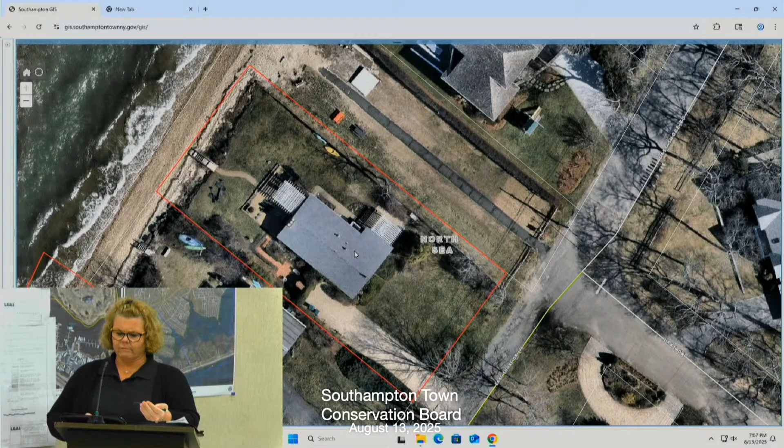But at first glance, I don't believe that the plan really makes much sense. It insinuates that the existing lawn is higher than the beach by a significant amount. The beach is at elevation 3, with the grade in the existing lawn between 5.5 and 6.5 feet above sea level. But I'm going to go back to that in a few minutes.

So at the last meeting, we discussed the elevations of the 5 other properties to the north where similar shoreline protection structures were approved by this board between 2018 and 2021. In reviewing the surveys for those projects available in the town GIS, there's no significant difference in elevation between 37 East Shore Drive and the 5 others to the north: 43, 47, 51, 57, and 59 East Shore Drive. All of the lowest elevations for the 5 other structures begin at around elevation 3, 4 in one circumstance, I believe, and go to a maximum height of elevation 8. Our property's existing elevation is around 6.5 feet.

So it's comparable. Recently, I was contacted by the owner of 63 East Shore Drive, who is the first property beyond the narrow association walkway that has a bulkhead, so from her property beyond to the north are all bulkheaded. She had contacted me because she wanted to ask about a potential project on her property, and reminded me that I met her at her property in 2019.

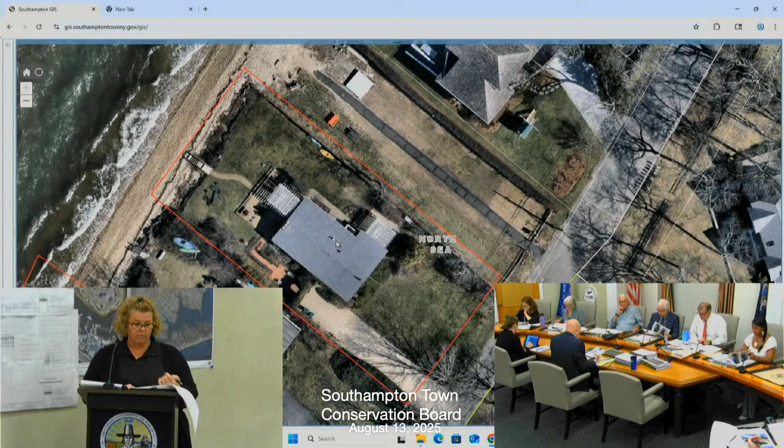So I wanted to show the consistency of the width of the beach throughout these photos, and the consistency of the makeup of the beach, in that the higher beach area is mainly comprised of cobble, and between the high water mark and that cobble is largely comprised of sand. Seaward of mean high water, you start to get more cobble within the water.

So that 1,000 linear feet stretches over 11 properties and the association access, between my client's property and the 43 East Shore, which is the first and most recent rock revetment that was allowed.

So all that being said, Marty provided me with a plan that I believe you should probably have in your file. I don't see it actually. Is this in here? It looks like this. Okay, yes. Along with a survey where he designates the areas that he's drawn.

So he's proposing a 3-foot wide by 5 to 6 foot high berm of cobble, proposing 2.5 inch to about 5 inch diameter cobble, with a 20-foot wide vegetated buffer beyond that. He's also proposing us to deposit cobble and sand, then plant within that cobble and sand to replace the existing lawn. So in my little time reviewing this, I kind of see this as a temporary fix.

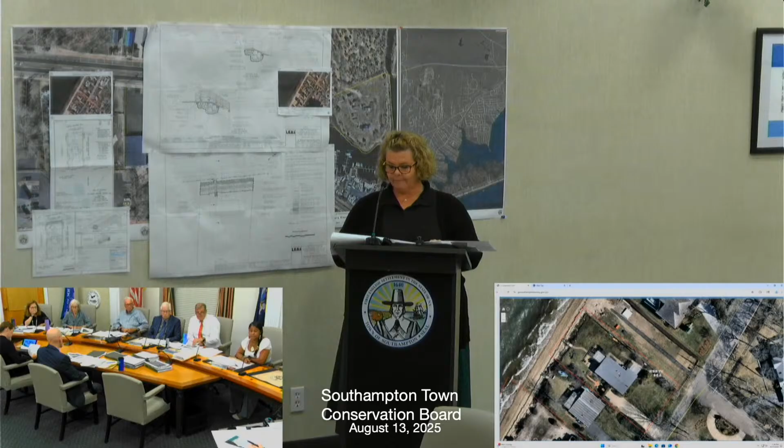Just a couple of reminders. The plans we submitted are identical in scope to 43 East Shore across the way, about 50 feet from where we're talking. Our proposal for an angled rock wall is better at dissipating wave action than something more straight. We discussed this at the last hearing. We also talked about the 5 other approvals—3 of those did not require this much scrutiny. In a hearing situation, they were just granted.

We discussed cobble and sand over the rock to be planted to stabilize it. We also discussed the loss of property—we estimate about 8 feet was lost between 2018 and 2024. So the goal is to maintain what was lost before it gets worse. There was no structural peril on any of the 5 properties, nor on this lot, but the goal is to prevent further erosion. Lastly, the New York State DEC granted us a permit for this with no questions asked on October 16th of last year, so we're sitting on that permit.

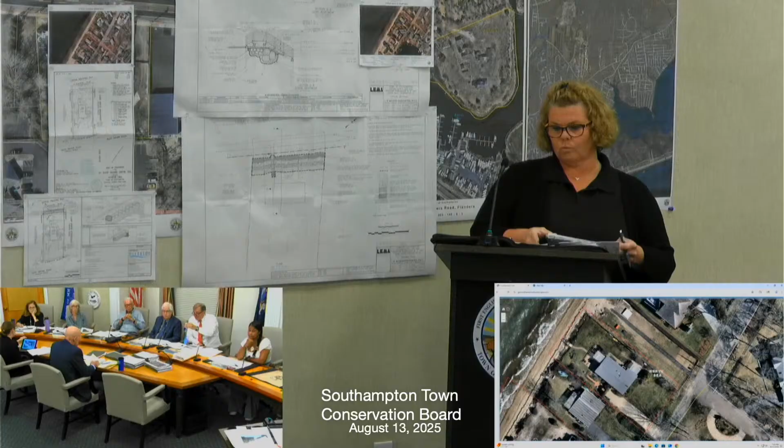Otherwise, I am here tonight with Nika Strunk, who would like to make a presentation, unless anyone has any questions for me.

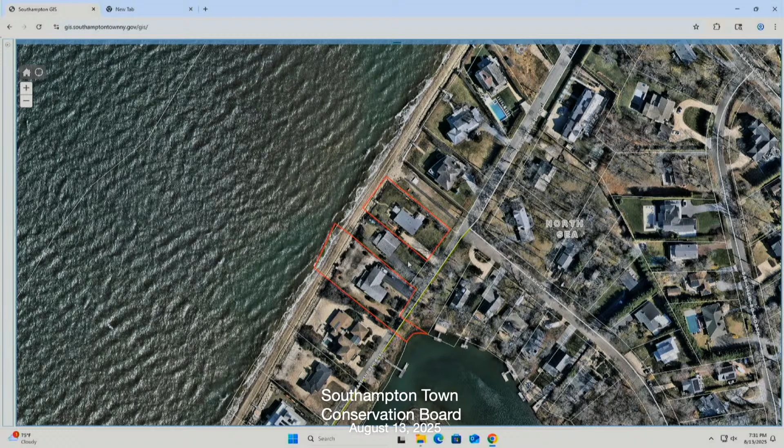And lastly, as a matter of law, which is the reason that I've been brought in here, this board is required to adhere to its prior precedent. It has to treat all applicants equally. I have 2 cases cited in my letter.

One is Hamptons LLC versus Rickenback. You have the cite in there, your counsel can review it, where a special use permit application was, quote, virtually identical to that of a similarly situated property owner in the same zoning district, whose application for the same special use permit had been granted by the appellants. A denial would have been arbitrary and capricious.

There's also the decision of Knight versus Amelkin, from the Court of Appeals, the highest court, that says a decision of an administrative agency which neither adheres to its own prior precedent nor indicates its reason for reaching a different conclusion on essentially the same facts is arbitrary and capricious. So I submit that as a matter of law, given this board's history of allowing property owners on this very, very vulnerable stretch of beach to protect their land, it would be arbitrary and capricious not to grant the application.

And I'm just going to make a little correction to my letter, and I'll submit it this evening. Thank you very much. I'm just going to write my name here. And I'm happy to answer any questions that you may have. Thank you.

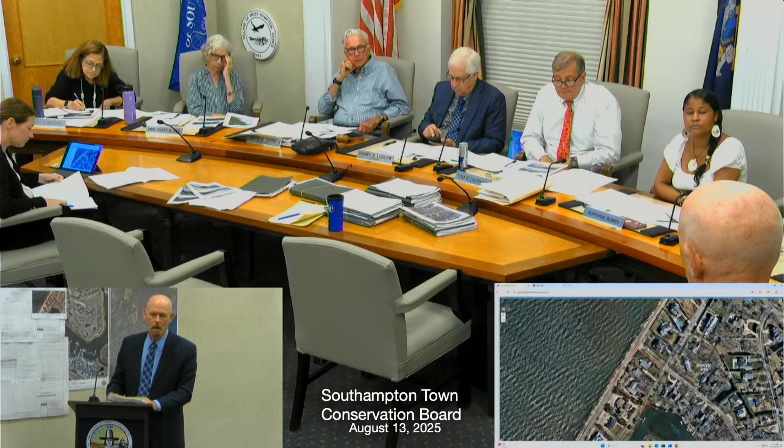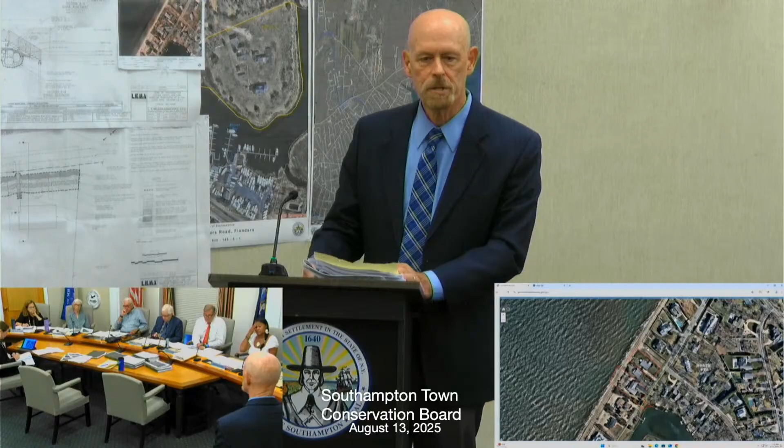Erosion is a natural process. It occurs along every bay beach, along every ocean beach. You have seasonal change from winter beach to summer beach. You have periodic storms. The erosion that occurs along beaches is not something that's artificial.

It's part of how the natural bay beach ecosystem functions. The degree of erosion at the subject property right now is not significant. The escarpment is about 1 to 2 feet. The home is actually located outside of the FEMA flood zone, and the improvements are located significantly landward of the beach. So they are at present at no risk of flood or storm damage, nor is there any evidence of recent damage occurring to those structures as a consequence of winter storms.

While the site conditions at every property are somewhat different, just quickly touching upon the permitting of rock further north - much of that, I believe, was done as a response and reaction to the court-ordered construction of a 6-foot-high concrete wall at 55 East Shore Drive. There was significant concern on the part of some that the presence of that seawall, which this board did not permit, would have

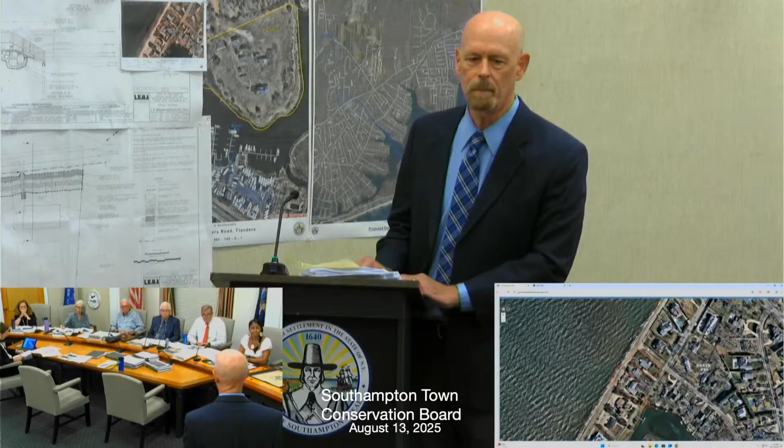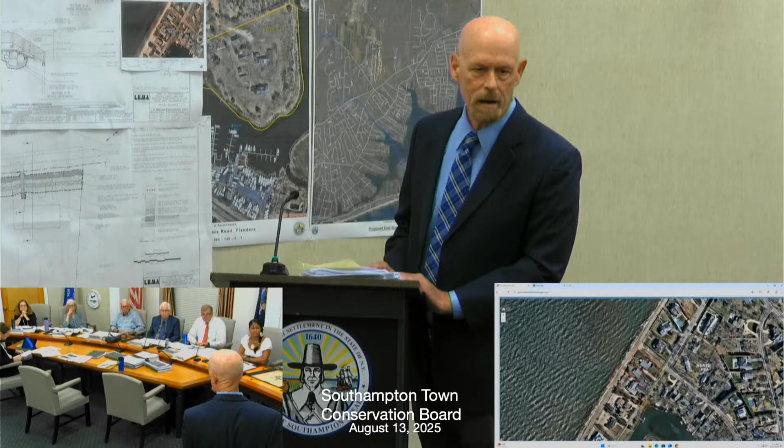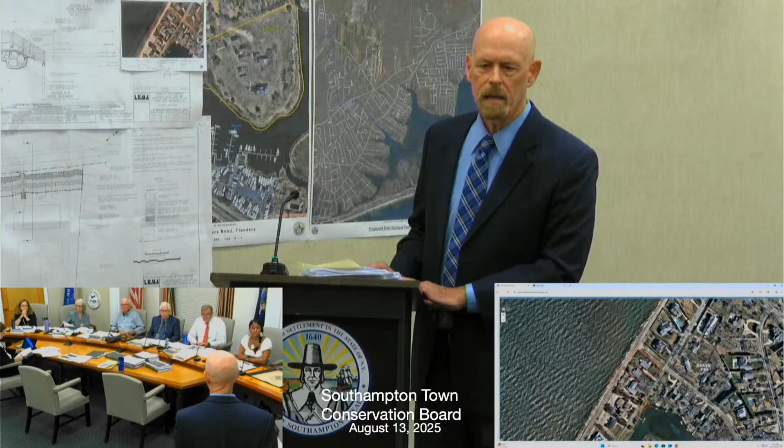So when you change that area by installing rock, you're destroying a lot of that natural upper habitat. You can also significantly modify the topography in a way that interferes with diamondback terrapins. Diamondback terrapins are estuarine turtles, and what they have to do is leave the bay and go up to the higher sand and upland areas in order to lay their eggs. If you have rock or major modifications made to the landform, it becomes a lot more difficult for diamondback terrapins to reach those higher nesting grounds, and if they do reach those grounds, it becomes a lot more difficult for their hatchlings to return to the bay. So the area that would be impacted by the construction of the revetment is an essential habitat area for wetland dependent wildlife.

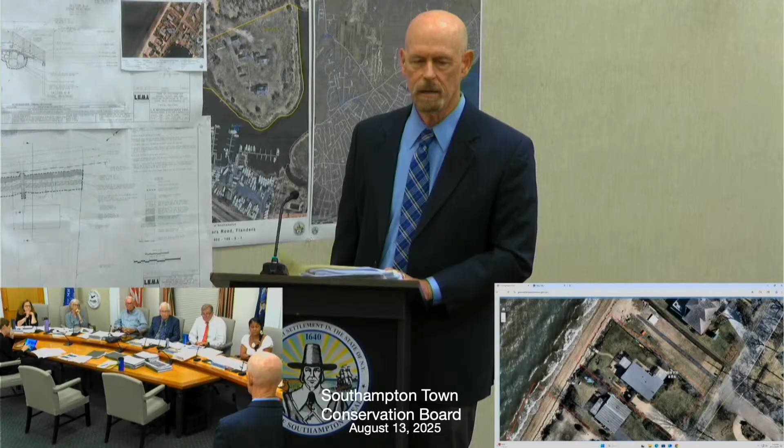When there is concern about potential environmental impacts, what the wetland permit issuance standards require is that the applicant evaluate practicable alternatives. The goal of that process is to select the practicable alternative that would be least environmentally damaging to the wetlands, and in this case, the greater bay and beach ecosystem, inclusive of that critical ecotone that takes in the upper beach and transition to uplands. One of the things I did was spend quite a lot of time looking at areas that are unarmored along Little Peconic Bay at present, and Noyack Bay as well.

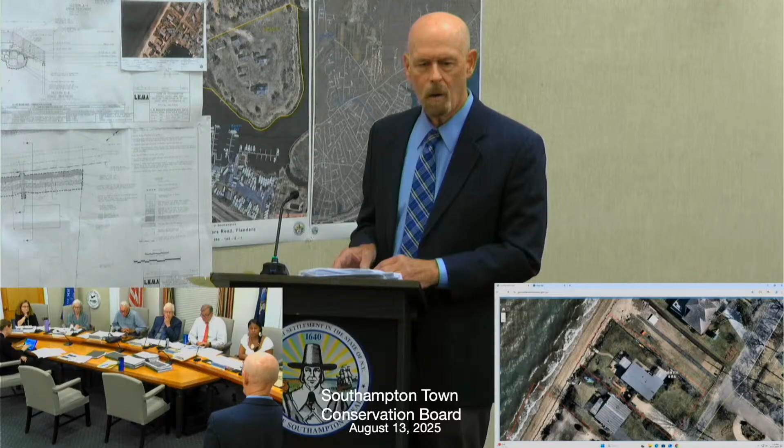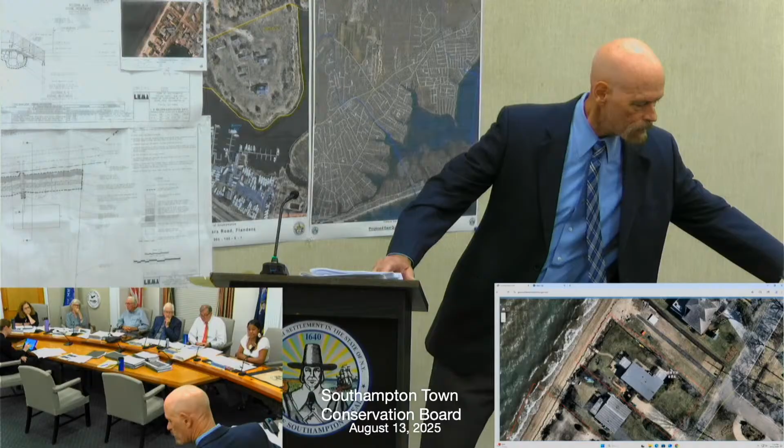And what I can offer into the record are countless photos of very similar beaches that have naturally occurring vegetation. Some of it is dense, some includes shrubs like groundsel, other areas consist basically of grasses. But what you have in these areas is a gradually sloping beach, a higher natural berm of cobble, and it's in that cobble area where you have naturally occurring vegetation. So one of the things I'll hand out are photos that were taken at many of these locations.

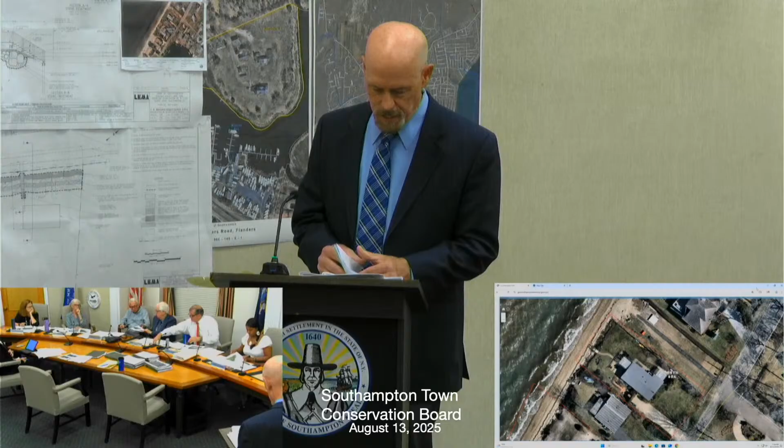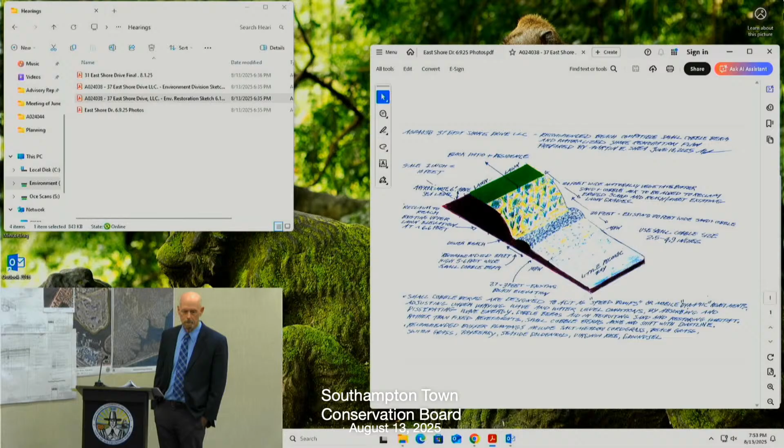The applicant had offered that if the revetment is permitted, and it was to be buried with sand and planted with beach grass, the applicant could commit to replenishing the sand and beach grass if that rock revetment becomes exposed, and possibly increases risk of seaward erosion because of deflective wave action.

We tried that in many years past. It's very hard to enforce a requirement whereby every year the beach conditions are monitored, and if the exposure of the rock or erosion exceeds a certain threshold, then the landowner is required to spend significant amounts of money to replenish the sand and beach grass.

Many of these properties change hands frequently, and I, for one, would not want to put that kind of burden on the landowner, that every year they're under the gun that in the event the permitted rock gets exposed, they're going to have to spend the money to place sand above that rock.

The difficulty with revetments is if they do become exposed, even if you place enormous amounts of sand over that revetment, the sand quickly filters down through that rock. It dissipates over time. It's easily impacted by high water events, and impacted by rainwater and runoff as well.

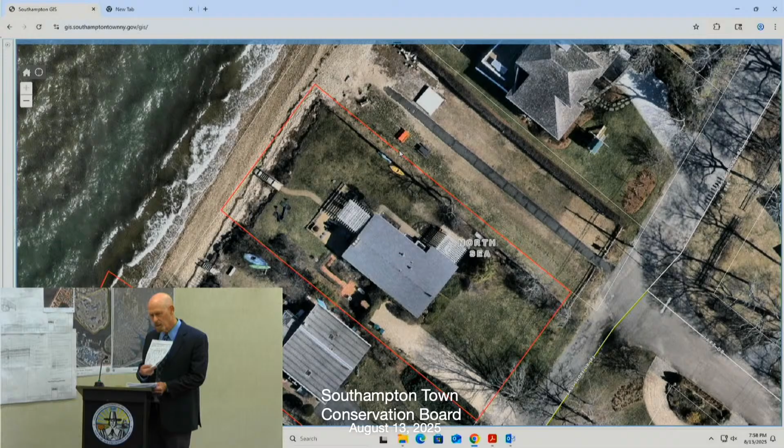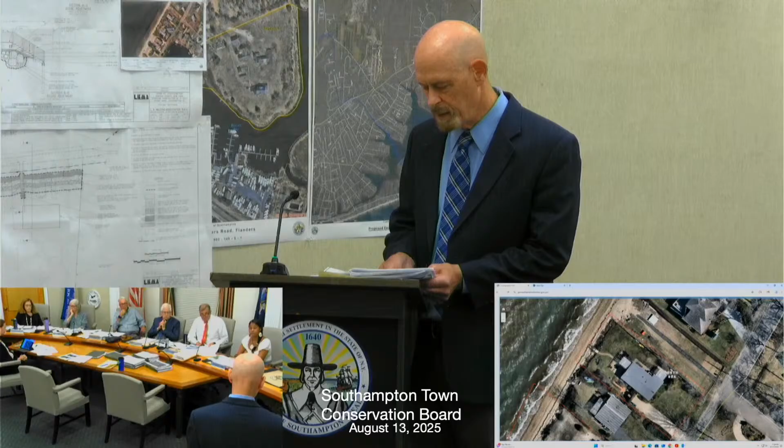And I would just mention, I think the board has a copy of my survey on which I sketched the recommended cobble berm and 20-foot buffer as well. Thank you.

As many of you may know, I have for the past 24 years been working in the town of Southampton, either as a town employee or on the private side. In the past 24 years, I have done permits for both sides up and down this stretch. I have been going to this beach for 24 years.

Looking at this bunch of photos that Marty provided, the main difference between these beaches and this beach is that these beaches in this packet are entirely cobble. There's very little sand here. Where here, historically, there has been cobble, some sand, and then more cobble in and out of the water. This beach has never been like these. It just has never been this way, to my knowledge.

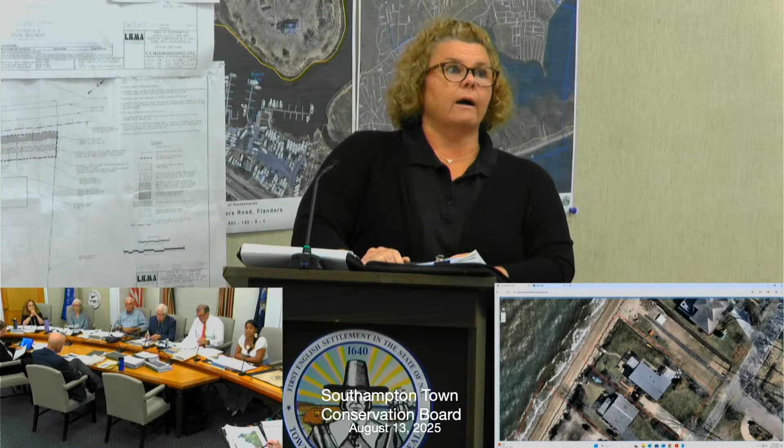Part of the reason that set of stairs was constructed by the prior owner and reinforced by my client was because of the erosion that occurred between our last discussion of this property in 2017 and my client taking over this property about a year and change ago. So yes, although it's not to the residence, it is damage to the property. There was landscaping there, albeit Rosa Rugosa and Montauk Daisy, that were part of that shorefront. That stuff has been eroded away or taken out from the storms.

Can I ask a quick question? Sure. One of the points that was made was that the erosion you've described is partially caused by the lawn being extended as far as it is. Do you think that could be part of the cause of the erosion?

Well, it certainly is exacerbating it when the waves are hitting the property. There isn't any deep-rooted vegetation necessarily. But if you look at the photos I provided tonight going down the line, a lot of these properties don't have vegetation and historically have not had vegetation, and they're also suffering damage. Some of them are more beach-driven, I think.

It's our obligation to look at this particular property, and I understand a legal argument has now been submitted that I think we're going to need to take the advice of counsel on, I assume. We'll take a little time to look at it, but putting aside the other properties and the precedential requirements that may exist as a result of those, my question is really going to this: are there other ways to prevent the erosion that you're expressing as the need for the revetment?

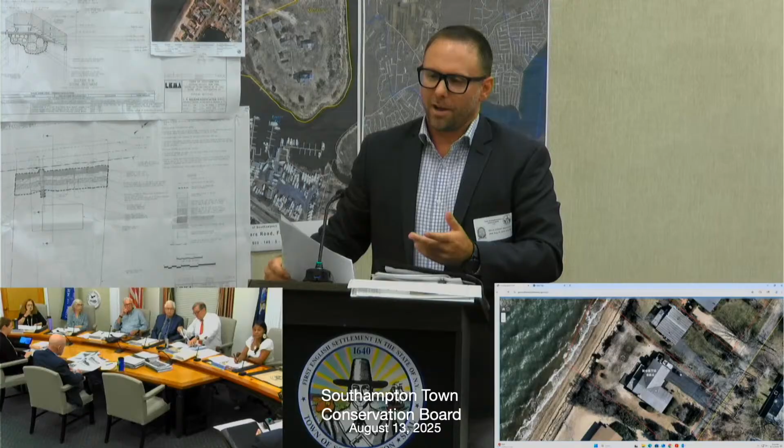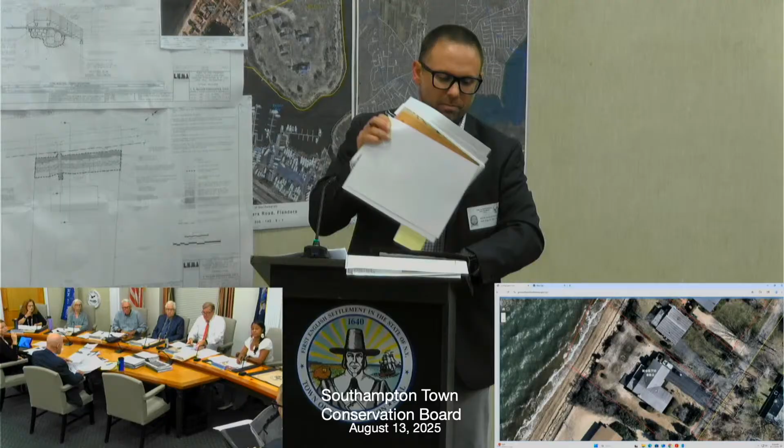I have a couple handouts. Would that be possible? I don't have enough to pass around. It's, I think, 4 total. Is it possible for everybody to share? Anything you hand out's gonna be retained. You have to have it stamped in first, but even if it's not enough copies, we can share.

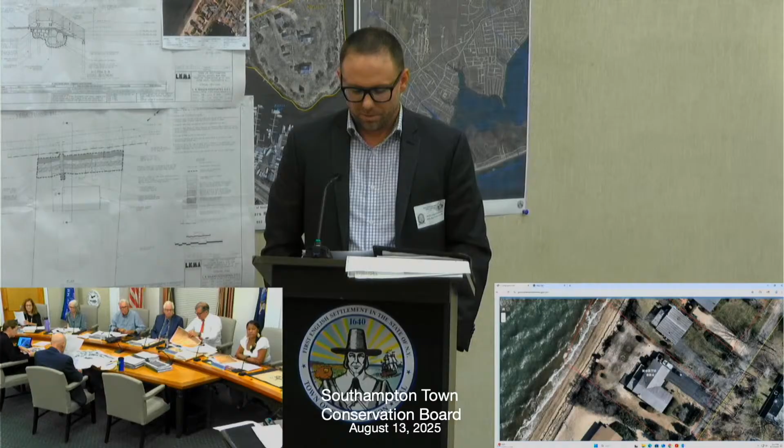Good evening, everyone. My name is Keith Masiria. I'm a civil engineer from LK McLean Associates, representing the owners of 31 East Shore Drive in Southampton. At the last public meeting on May 28th, I presented a shoreline stabilization project which involved the construction of a stone revetment, timber beach access staircase, and a 10-foot wide vegetated buffer.

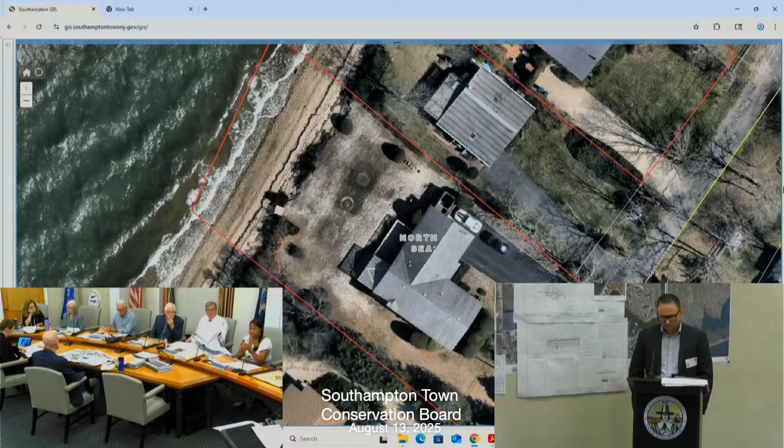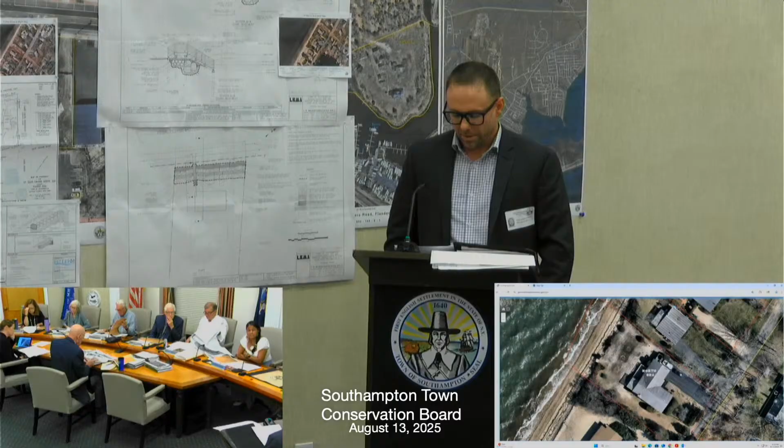The staircase, as well as the 10-foot wide non-turf buffer, remain landward of the cobble on top of the revetment. The cobblestone, which is to be placed on top of the revetment, will match what is currently on the beach, therefore maintaining the existing habitat that currently exists at the site. The homeowner, in good faith, has also agreed to replenish the cobble as necessary to prevent exposure of the revetment, which will maintain the aesthetics of the beach and also maintain the existing habitat. As the beach erodes over time, the homeowner has agreed to fill that area back in.

During the design process, wave heights used for the evaluation of various shoreline protection features were calculated by our engineers in accordance with the U.S. Army Corps of Engineers Shore Protection Manual, with a fetch of approximately 5 miles to the northwest. These calculations can produce wave heights upwards of 7 feet, depending on the still water conditions at the time of the storm event. As stated in the New York State Department of Environmental Conservation Tidal Wetlands Guidance, dated 2017, vegetation can't withstand waves in excess of 5 feet. I find that to be closer to 2 or 3 feet, but seeing as how the calculations show that the waves would be well in excess of that, in either case, vegetation alone would not survive in this case.

Based on these calculations and our observations of the shoreline, we find it necessary to harden the shoreline through the construction of the revetment.

However, to ensure that there are no adverse impacts, we've included cobblestone over the top of the revetment, which will continue to be replenished. This was successfully completed at 43 East Shore Drive, approximately 183 feet to the north. We went there recently, in June, and it looks nice. There were small pieces of the revetment that might be exposed, but otherwise it basically just looks like the beach profile extends up onto the top of the revetment. In the event of a severe storm in the winter, the stone might become temporarily exposed, and it would become covered again following the storm.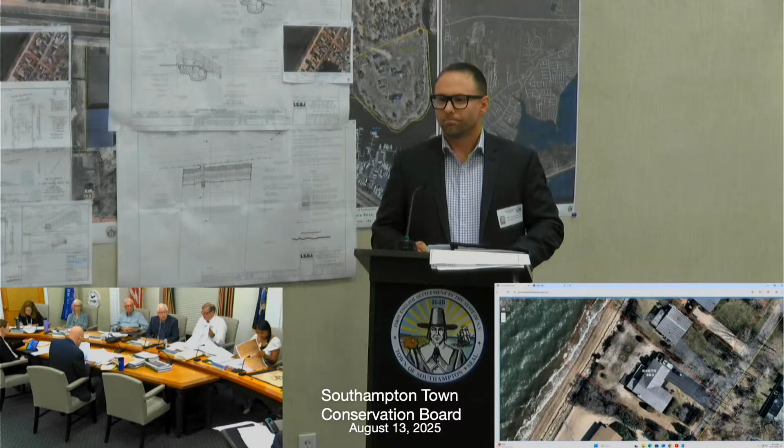Could you tell us approximately how many feet the expanse is between your proposed revetment and the water?

I would say it's about 20 feet between the toe of the stone and the spring high water mark. But, as discussed earlier, the storms this is being designed for are not your run-of-the-mill high tide event. This is extreme weather events when you're getting 50, 80 mile an hour winds out of the northwest, battering the shoreline. So to add to that, any sort of vegetated feature or cobble will be washed out with certainty if it's in this wave action area.

So that means if the erosion continues, putting a shore hardening device in will not stop the erosion, it will simply provide some kind of a backdrop to say, that's as far as you can go. Correct, until we get one of those storms that takes it out regardless of how big the structure is. Yeah, and that was our thought process. We want to say, this is as much land as hopefully the homeowner will lose. And when that storm happens, and we know it will, the homeowner will build it back again, donating sand and cobble and everything else back to the beach area.

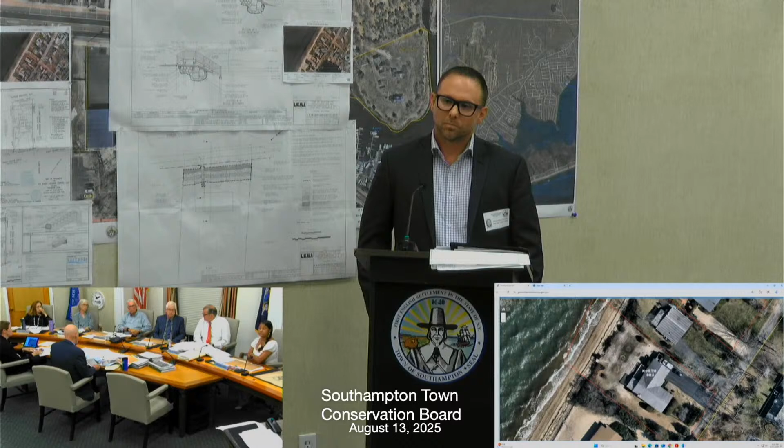15 feet in 50 years. So in another 50 years, it'll be 5 feet of beach at the same rate.

Correct. And so what we are doing here is we bury the stone beneath the ground to prevent that top layer from becoming undermined. So in the event that the beach does keep dropping, and say the water is deeper, our stone will still stay in place. That's why it's critical to make sure that's buried as far as it is.

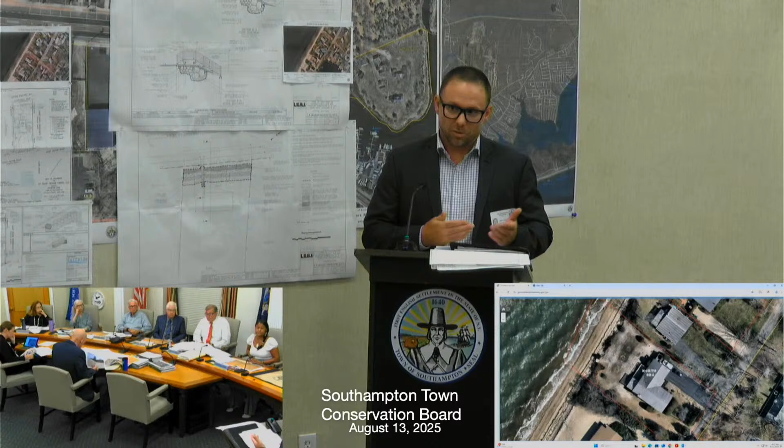But the fact that we're replenishing it, the homeowner at 43 is also replenishing it. Maybe these sort of measures will prevent this same rate of erosion, might be less, like with the added cobble to the beach. Does the lack of the beach in another 50 years concern your client?

I think that it would, yeah. But probably if this structure is put in, there will be no recourse. The die is cast. The beach goes.

I don't think that this is going to cause any erosion. And I think the fact that he's adding the soil or the stone back to the beach is going to slow that rate of erosion down.

I don't think adding stone changes the rate of erosion. It just changes where the erosion is going to be. It's going to be in the beach, and when the beach gets used up, it's going to be what's added. That is very concerning to me, and also concerning to me is how that might affect other homes nearby.

I would say the majority of the homes, there might be 3 or 4 total along the stretch that don't have some sort of hardening feature. Of the 7 properties or so to the north, all have them, with the exception of, I think, the area with the homeowners beach association that has access. But even if you go downdrift, I didn't mention them because they were a little less substantial, but there's 2 or 3 homes that also have hardened features.

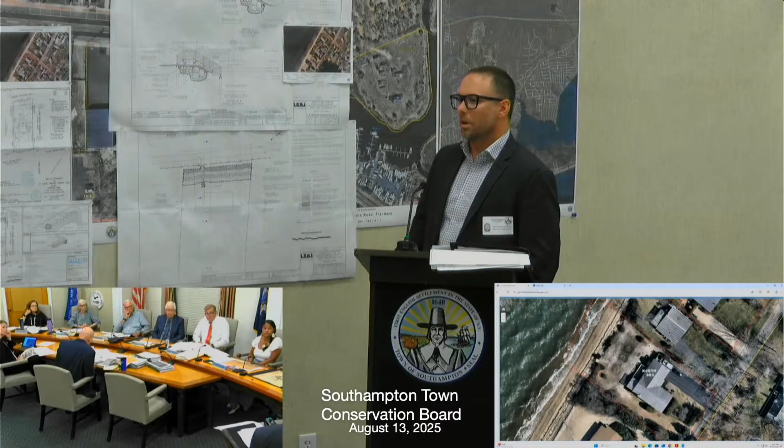So when you say, our revetment, quite honestly, it's like 2 feet high. It's like one large rock. We're trying to just lock in the end of this property.

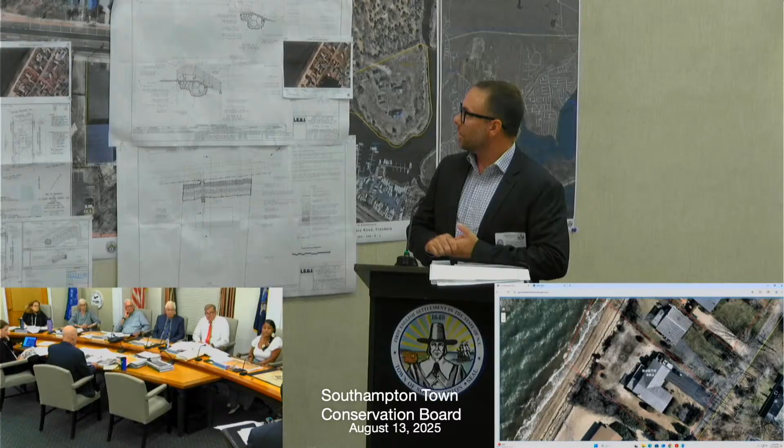I do think we're almost following the exact slope of the beach. It's a very minor improvement here, in addition to the fact that we are taking the lawn out. So I think all of these aspects combined should help to keep this area stable. And I do think that replenishment of this property as well as the other properties will slow down that rate of erosion.

Are you proposing a buffer from the crest of that revetment towards the house? Yeah, it's 10 feet. So currently the homeowner has grass between the escarpment, we'll call it, all the way back to the house. And there's some sort of upland species kind of mixed throughout that would be replaced with American beach grass and some other native wetland plantings.

Okay, I may have questions later. Marty?

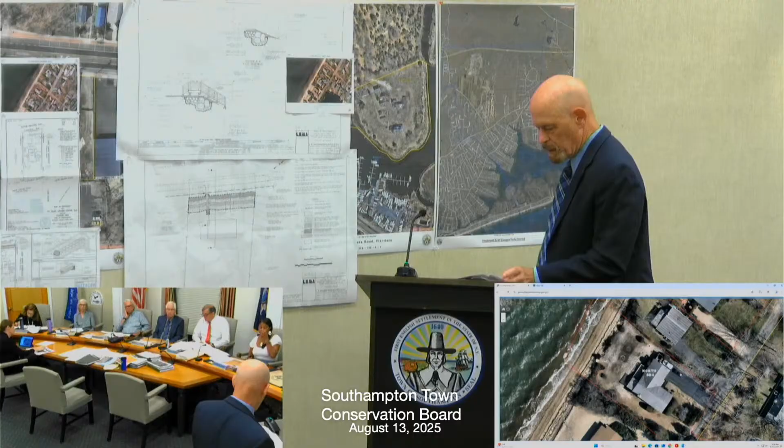Good evening, Martin Shea, Chief Environmental Analyst for the town. As was discussed at the first hearing on this application, I see nothing about the current conditions or the historical trend in erosion at this property that would warrant installation of an engineered rock revetment. There is a preliminary advisory report on file dated April 17, 2025 that details the concerns that I have with regard to potential adverse wetland impacts resulting from armoring of a shoreline.

The residence is located landward of the FEMA designated flood zones. So the residence is secure. This is notwithstanding that there may have been some retreat in the shoreline over 50 or more years. The improvements are located at significant setbacks landward of the beach.

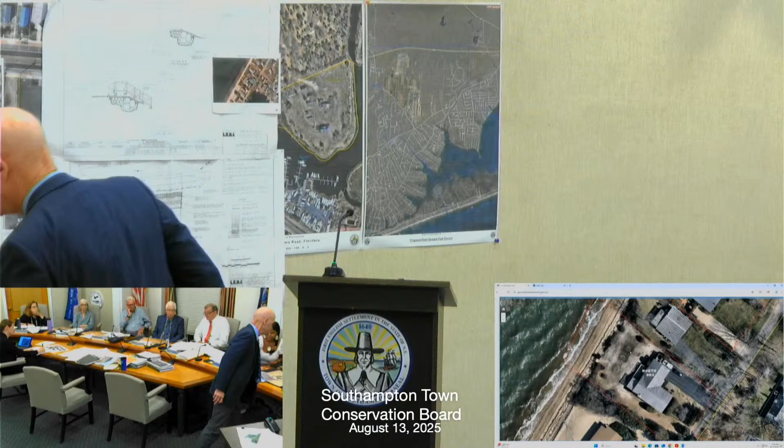At the first hearing, I had shared with the board photos of the subject beach front. I'll hand those up again. Notwithstanding that the winter storm event has damaged some vegetation on the upper beach, the beach is stable. The applicants are looking to maintain a lawn extending almost entirely to the beach. Lawns are shallow rooted. When you have storm events where high water comes up, the lawn can't hold that soil, so the presence and continued maintenance of an expansive lawn is only contributing to the erosion at this property.

Again, as part of the record for this hearing, I can offer photos that were shared with the board at the prior hearing of other naturalized beaches in the area, which I will share with the applicant, that show that significant upper beach cobble and natural vegetation can be very effective in achieving the goals of providing good stabilization of the beach.

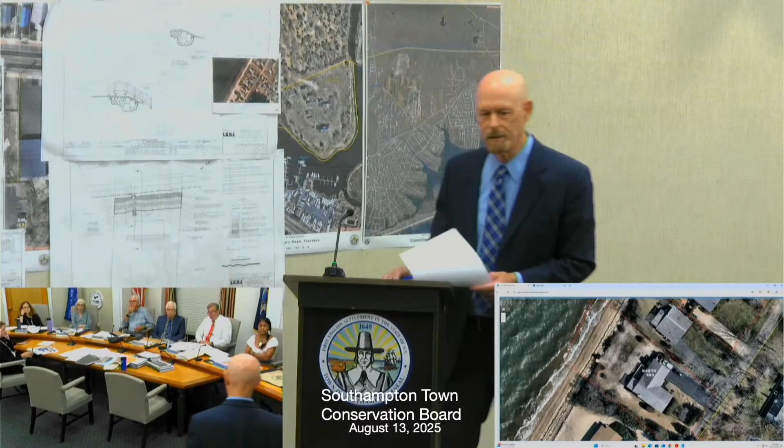Any response? I'll just touch on a couple of the points that were made. We understand that it's a burden to replenish the cobble, but the homeowner has agreed to do that because he's obviously in favor of the project. We find that the revetment, in theory, is consistent with a lot of the photos provided, in that you wouldn't even see it. So it's going to be acting in the same manner for 95% of the time. There might be some temporary instances where it becomes exposed, but then the homeowner would have to recover that revetment again.

And regarding the photos that were provided, every site's different. Wave calculations are based on the depth of the water, the wind direction, the phase of exposure, the seasons that impact it, the temperature of the air and the water, and a lot of other things. So there might be an instance that is okay, like this picture looks great here, but I'm sure they're not getting 7-foot waves, because if they were, this wouldn't survive. That's my opinion.

I would have to look into some of these a little more closely, but vegetation, generally speaking, does not survive in a high wave energy environment, which our particular site is located in. As an engineer, you have the capability of doing those calculations to figure out what a 5-mile fetch wave height might be. Do you have any historical data to show what the maximum wave height has been in the past 50 years? I do not, but we have documented wind speeds from certain storm events, so we could correlate that too, if need be.

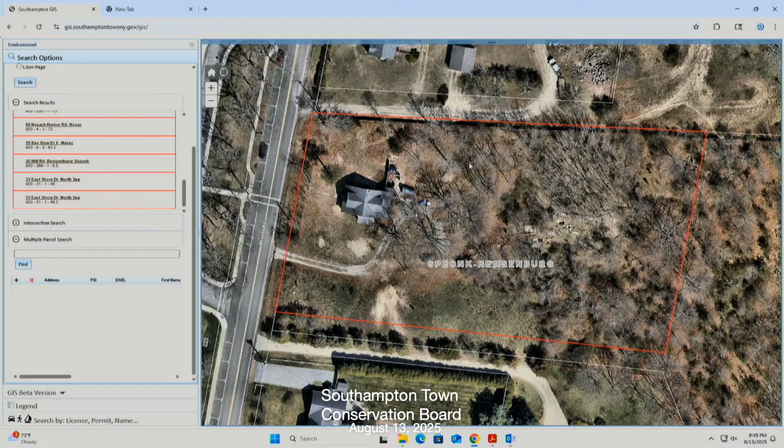There are several recommended comments. First, pursuant to section 292-39B, draft conditions of final conditional map approval relating to wetland preservation will need to be forwarded to the Conservation Board for future consideration and adoption of a resolution, as the rear portions of proposed parcel 2 appear to lie within 200 feet of town regulated wetlands to the east.

Second, the survey depiction of proposed parcel 2 as a wooded area is incorrect. Based upon an August 6, 2025 Environment Division field assessment, more than 15 large native trees were recently cut and felled without authorization, destroying key forested watershed land for the approximate upper Speonk River, as well as showing disregard for the environmental benefits once offered in terms of thermal cooling, carbon sequestration, and air purification. This is particularly concerning in light of recently documented record-breaking average high global temperatures and what unfortunately appears to be an unstoppable climate change.

Habitat for native flora, insects, songbirds, eastern box turtle, white-tailed deer, and other wildlife was also affected. The merits of the wooded property in terms of maintaining community character, as well as potential need for a wetland permit prior to tree cutting and site disturbance, appear to have been largely ignored.

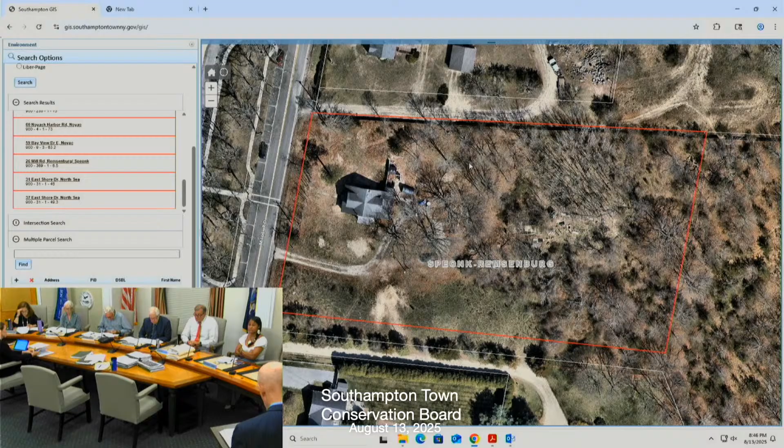Thirdly, this resultant environmental damage needs to be countered by requiring that the remaining large white oaks and eastern red cedars be protected to the maximum extent practicable, and by requiring that significant portions of the tract be reforested. In that regard, any pre-application approval should strictly be conditioned upon the applicant coming forward with a native tree planting and partial woodland recovery plan.

Additionally, natural land needs to be protected at the rear of parcel 2 in order to bolster and support the abutting 1.8 acres of town preserved land to the north. Fourth, a conservation easement needs to be utilized as a means of establishing and preserving a wildlife movement corridor and dispersal route, as well as a natural habitat connection with the abutting northerly town preserve. Creation of a minimum 50-foot wide conservation buffer is being recommended along the easterly rear lot line of parcel 2.

There's one more recommended comment. Lastly, the subdivision map also needs to be revised to note that construction of a new dwelling on parcel 2 will be conditioned upon installation of a new IAOWTS, thereby lessening negative effects on ground and surface water quality.

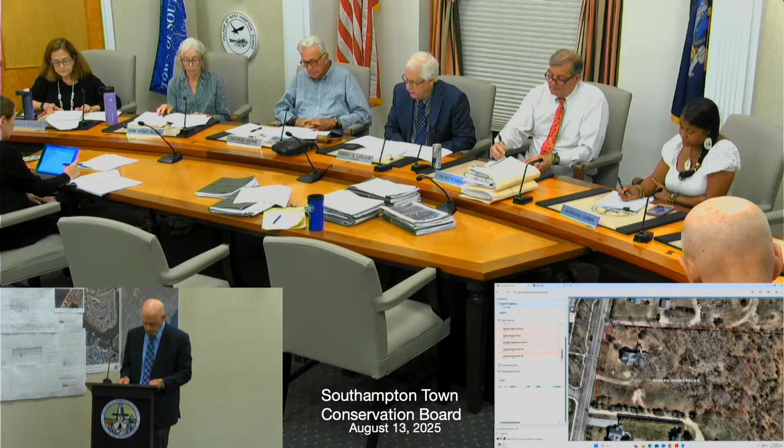This pending variance application relates to an existing developed property that just received Conservation Board approval to be redeveloped at 55 Bayview Drive East in the Hamlet of Noyac. There are 3 recommended advisory comments.

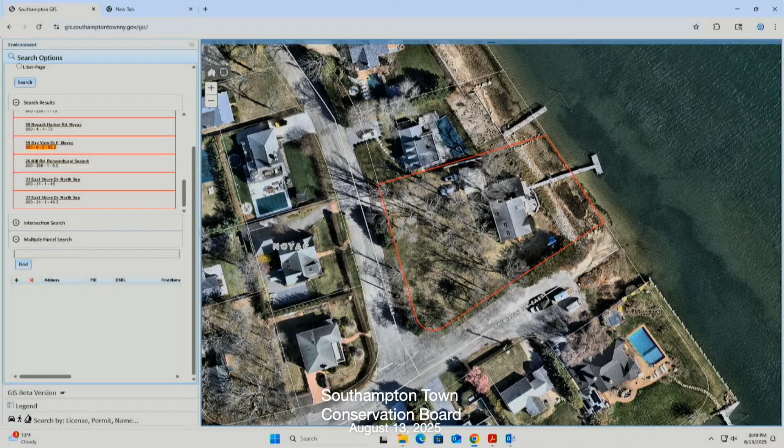The first confirms that the survey, prepared by Paul Borelski, dated August 5, 2024, last revised June 10, 2025, which was filed with the pending variance application, has already been conditionally approved by the Conservation Board on June 11, 2025, contingent upon recording of a covenant establishing wetland preservation area, naturally vegetated wetland non-disturbance, non-fertilization buffer extending 75 feet landward of the wetland boundary. Second, notwithstanding this approval, the uplands at the site are marked by a considerable number of mature

native trees with significant value in terms of community character, carbon sequestration, thermal cooling, air purification, and wildlife habitat. Thirdly, tree protection zones should therefore be established wherever practicable to minimize tree loss and preserve these benefits.

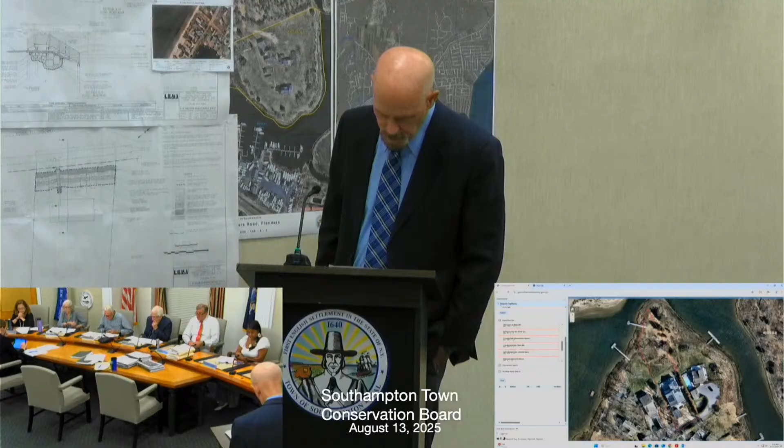This variance application relates to waterfront property at 60 Noyack Harbor Road, Noyac, that contains considerable wetlands. First, it's indicating that the existing residential improvements as depicted on the survey that was submitted with the pending variance application, inclusive of the 2-story detached garage for which a variance is being sought to allow for an accessory apartment, have been authorized by the Conservation Board pursuant to wetland permit number CB 18033, which was issued on March 29, 2018.

Said permit was contingent upon recording of a covenant establishing a wetland preservation area, a naturally vegetated wetland, non-disturbance, non-fertilization buffer landward of the wetland boundary. Second, certificate of wetland compliance number CWC 220003 was granted on January 25, 2022, thereby deeming the improvements compliant with the terms and conditions of permit CB 18033 and closing out the wetland permit. Lastly, no additional wetland permits or approvals are needed to authorize the garage conversion to accessory apartment.

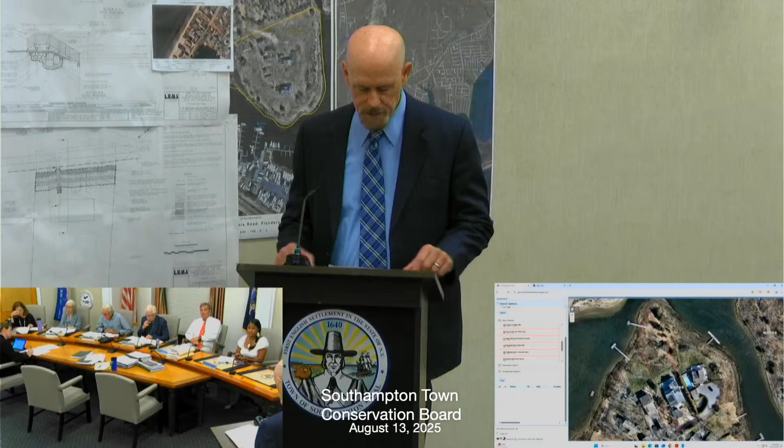Motion to send those comments to the ZBA. All in favor? Aye. Opposed? John and Meredith Noonan.

The Noonan application relates to residentially developed property at 204 East Montauk Highway in Hampton Bays. There are 2 comments being offered. The first is that the proposed residential redevelopment plans, as depicted on the survey prepared by Ralph Heil, dated November 5, 2020, with the latest revision date of September 12, 2024, for which a variance is being sought, received a letter of wetland non-jurisdiction pursuant to Chapter 325 of the Town Code on December 5, 2024.

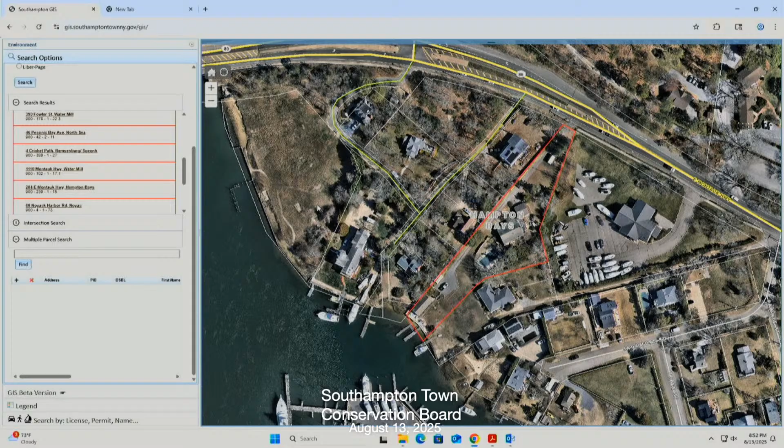And second, no wetland permits or approvals are needed. Moreover, as an IAOWTS is being installed, there are no significant environmental concerns regarding this application. Motion to send those comments to the ZBA. Second. All in favor? Aye. Opposed? Watermill Building Supply Realty LLC.

This pending variance application relates to a subdivision that's being considered by the planning board. The tract is located on Montauk Highway in Watermill. The first comment confirms that the tract, which is proposed for subdivision, is located greater than 200 feet landward of the nearest town-regulated freshwater wetlands.

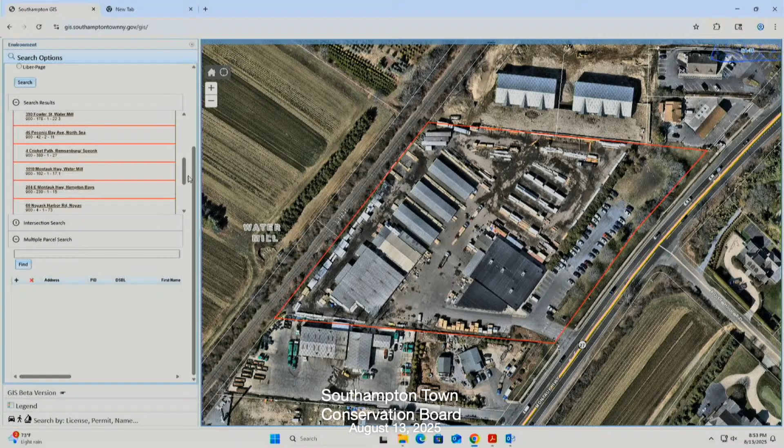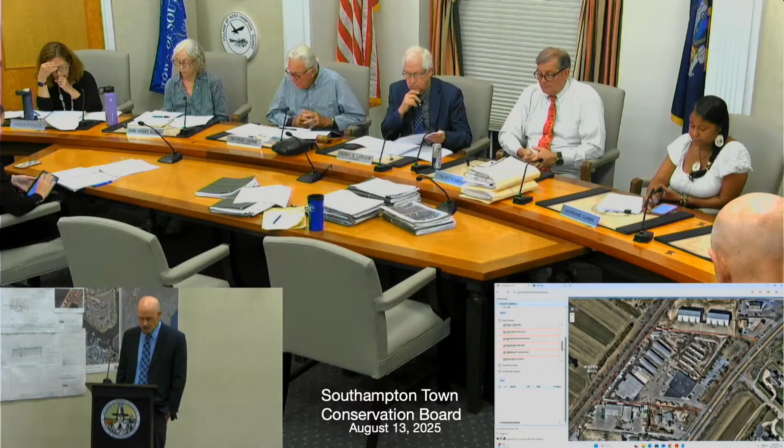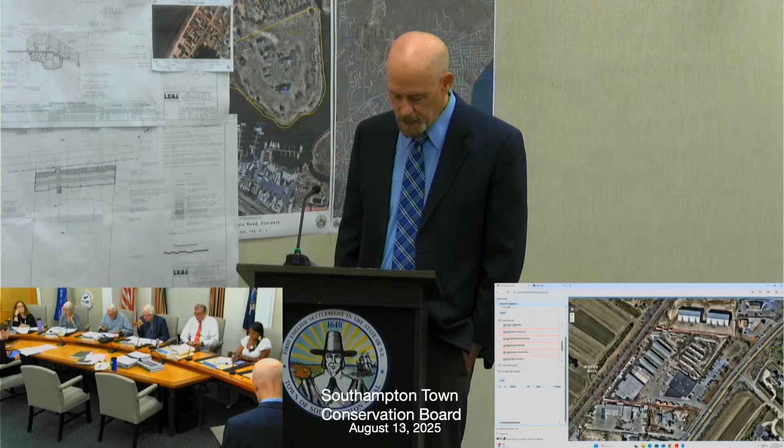Second, it's indicated that the tract is located within the town's high priority water quality improvement zone and the county designated Mecox Bay and tributaries watershed. The new commercial building should be serviced by a nitrogen reducing IAOWTS with intended sanitary improvements detailed on the subdivision map. And lastly, the new commercial building should be equipped with solar panels in order to reduce energy demand. Motion to send those comments to the ZBA.

Second. All in favor? Aye. Opposed? South Dune Builders LLC.

This relates to a residentially developed property at 4 Cricket Path near the hamlet of Remsenburg-Speonk. First, it's indicated that the planned first and second floor residential additions for which variances are being sought are located greater than 200 feet landward of the nearest town regulated wetlands. Thus, the planned improvements do not require a wetland permit.

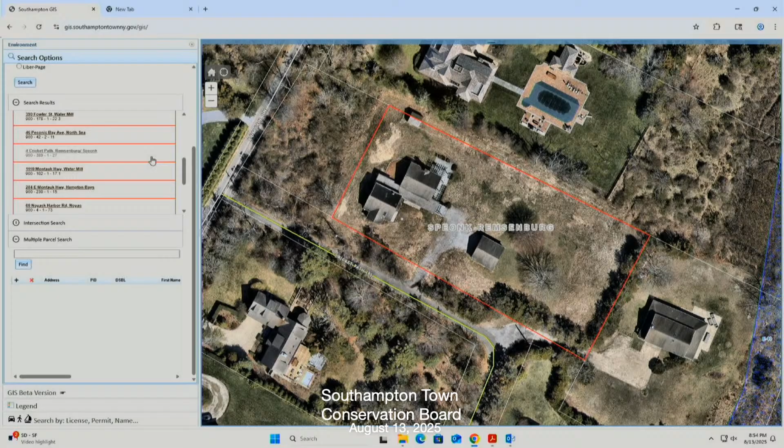Second, as significant home expansion is planned, a nitrogen reducing innovative alternative on-site wastewater treatment system needs to be installed. And thirdly, the location and configuration of the intended IA/WTS needs to be shown on the survey. Motion to send those comments to the ZBA. Second. All in favor? Aye. Opposed? Martin Vidgefinkel and Julie Jalima.

This pending variance application before the ZBA relates to residentially developed property at 46 Peconic Bay Avenue in the hamlet of North Sea. There are two brief comments being offered. The first indicates that, as indicated by the applicant, the planned improvements for which a variance is being sought have already been authorized pursuant to Conservation Board Wetland Permit number CB 22035.

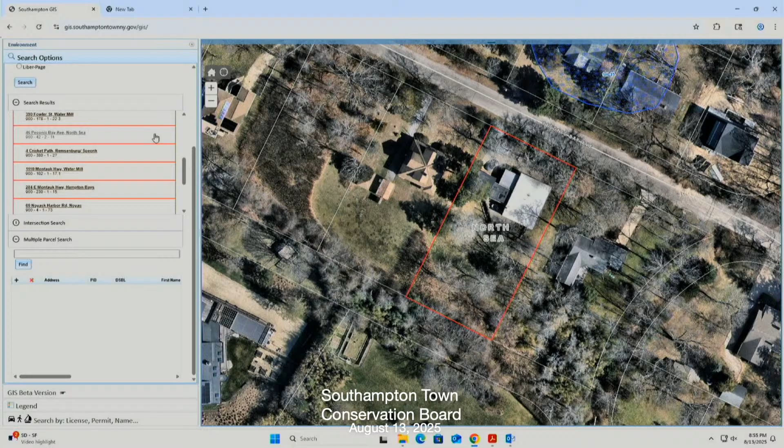And second, Administrative Wetland Permit renewal number REN 25043 CB 22035-1 was issued on August 6, 2025, thereby extending the term of the permit to July 29, 2026. Motion to send those comments to the ZBA. Second? All in favor? Aye. Opposed? The administrative wetland permits are in your packets.

Resolution of conditional approval, A021077 Anthony Rapolo. This is postponed to August 27th. Motion to postpone to August 27, 2025. Second. All in favor? Aye. Opposed?

A024044 Bradley A. Edgar and Lauren D. Edgar. Any discussion? Move to issue. Resolve that a conditional wetland permit approval be granted to Bradley Edgar and Lauren Edgar for the proposed project, subject to the terms and conditions set forth therein. All in favor? Aye. Opposed?

A024068 134 Middle Pond Road LLC. Any discussion? Move to issue. Second. Resolve that a conditional wetland permit approval be granted to 134 Middle Pond Road LLC for the proposed project, subject to the terms and conditions set forth therein. All in favor? Aye. Opposed?

A025020 Burnett 2012 Family Trust. Any discussion? Move to issue. Second. Resolve that a conditional wetland permit approval be granted to Burnett 2012 Family Trust for the proposed project, subject to the terms and conditions set forth therein. All in favor? Aye. Opposed?

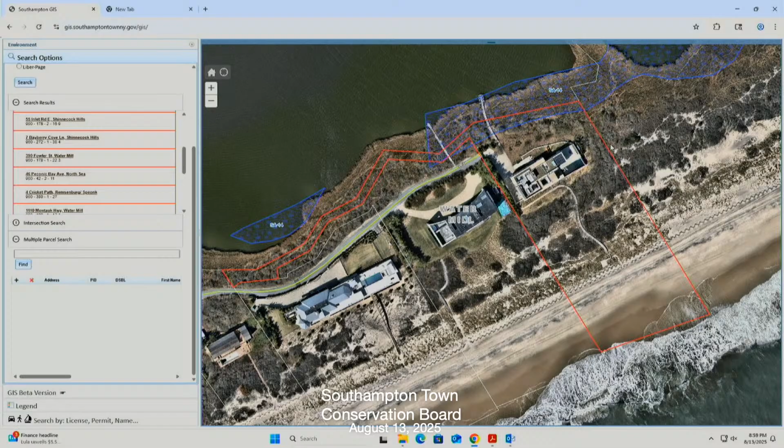The work would be accomplished by repeated selective hand cutting and removal of Phragmites while avoiding trampling and disturbance to other native vegetation. No herbicides would be utilized. I have put forward a plan that the applicant has agreed to, wherein, in addition to removing unauthorized deer fences as part of the work, the Phragmites management would adhere to strict seasonal restrictions to avoid potential adverse impacts to breeding and wintering wildlife.

The work would also be phased in. I provided a drawing which would allow for commencement of the Phragmites removal in the western sector of the property, and if, as a consequence of monitoring, that work is successful, then they would proceed with the remaining proposed Phragmites management in the easterly sector of the property. As part of the work, they would also look to hand cut and remove other non-native invasive upland vegetation as well. The applicant has agreed to the recommended mitigation.

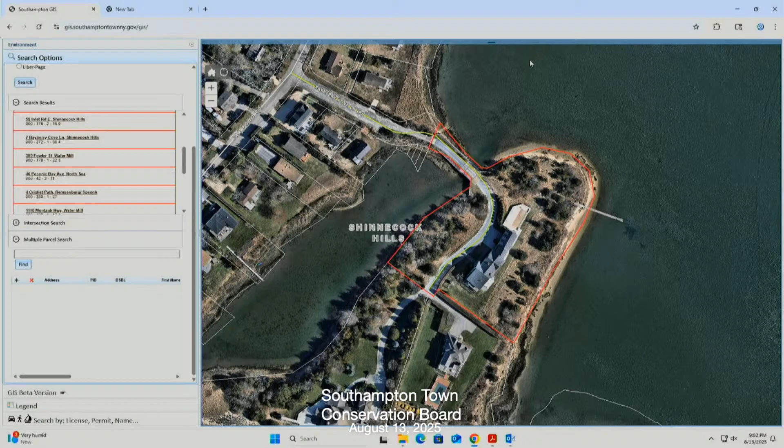Aye. Opposed? A025037 Bayberry LLC. This application relates to an existing residential property. There is quite a large residence that was permitted at the site; as a condition of that permit, the landowner has established an extensive covenanted wetland preservation area, an expansive naturally vegetated wetland, non-disturbance, non-fertilization buffer. There are accessory improvements at the residence that the applicant is seeking to upgrade and change.

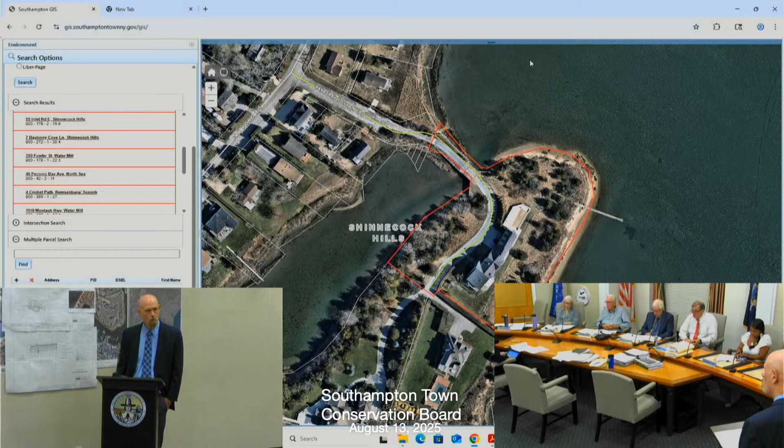The entirety of the work would conform to the minimum required wetland construction setbacks. There is some remaining fencing in excess of 6 feet, which needs to be removed. At the site, there are also some incursions in the buffer, and the applicant is going to come forward with a plan to restore those areas of site disturbance.

This is an application for which we have sufficient information to make a determination. As such, recommending that the public hearing requirement be waived. Motion to waive the public hearing. Second. Resolved that the Town Conservation Board hereby waives the public hearing requirement pursuant to Chapter 325, Section 325-80 of the Town Code. All in favor?

Aye. Opposed? A025010 Firefly Pond LLC. This application relates to a property that has frontage on Cold Spring Pond and extensive tidal wetlands. There is a preliminary advisory report dated August 6, 2025, which details the accessory improvements that are being planned at the site.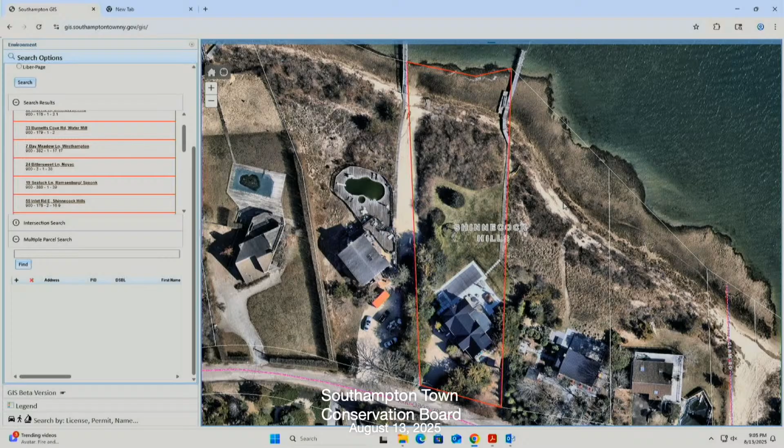There has been a landward advance in the extent of wetlands at the property as found by the applicant's consultant. The applicant has proposed to file a new covenant preserving those wetlands and establishing a buffer extending 75 feet landward of the wetland boundary that would be fully restored to seaside suitable native vegetation. However, a portion of the pool patio, which the applicant is looking to extend, would come in its closest point less than 100 feet landward of wetlands. So I have recommended a partial expansion of the buffer beyond 75 feet and that area be restored, which the applicant has agreed to. This is an application for which we have sufficient information to make a determination.

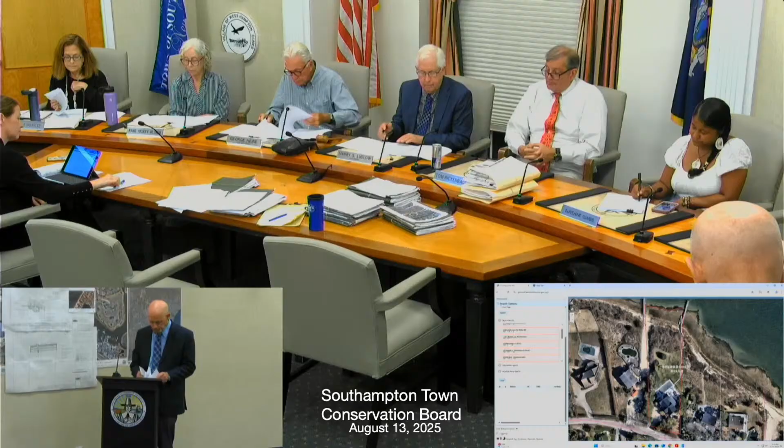As such, I'm recommending that the public hearing requirement be waived. Motion to waive the public hearing. Second. Resolved that the Town Conservation Board hereby waives the public hearing requirement pursuant to Chapter 325, Section 325-8 of the Town Code. All in favor? Aye. Opposed?

A025015, Andrew Perrell. This application relates to a property at Seatuck Lane in the Hamlet of Remsenburg, Speonk. There is a preliminary advisory report on file dated August 4, 2025.

There is a small cottage at the property that today is uninhabitable. The former owner had started renovating the house and then apparently decided to sell the property. The new owner wants to demolish the existing home and elevated deck and build a new home, elevated deck, and small pool in essentially the same footprint. Would install an IAOWTS.

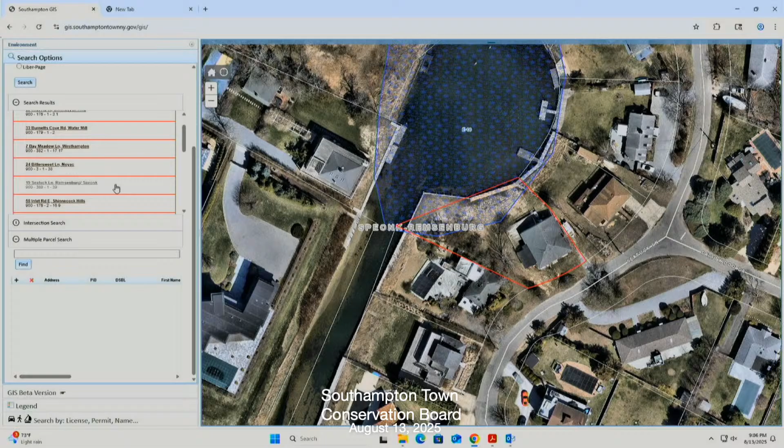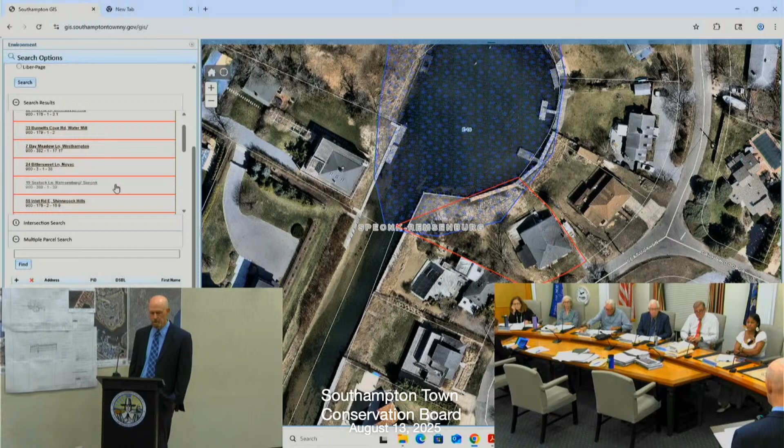This is a waterfront site that had been bulkheaded many, many years ago. The low wall bulkhead had almost fully deteriorated, resulting in nearly full recovery of healthy tidal wetlands extending as far as 20 to 25 feet into the property.

Notwithstanding the presence of those wetlands, the applicant, without authorization, began to clear and backfill those portions of the property, was cited, and was required to file an administrative wetland permit application with me in order to restore the site.

Rather than file that application, the landowner submitted a permit application to the Board of Trustees to seek authorization to re-bulkhead the property, received such permit, and was also allowed to heighten the bulkheads and entirely complete the job of clearing and backfilling the extensive recovering tidal wetlands on the property.

While ideally, my wish would be to see those bulkheads removed and have the natural shoreline and wetlands fully restored, acknowledging that it is within the trustee's authority to permit a bulkhead.

Rather than ask that the bulkhead be removed, I'm asking that the entirety of the land between the bulkhead and the new residence be covenanted as a naturally vegetated buffer, be fully restored. Trustees had required a stone buffer along a significant portion of the shoreline. I'm asking that that stone be removed and that that area be restored to native vegetative cover as well. And I'm also asking for changes in the trustee required plantings.

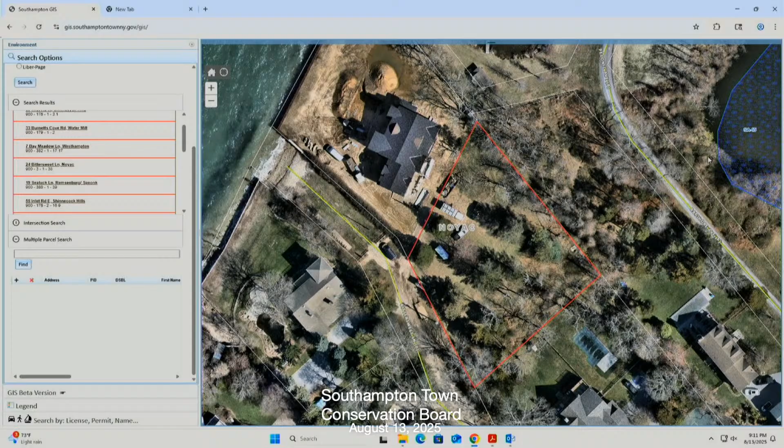The project plans show the expansive buffer and only need some minor revisions, calling for removal of some old existing wire fence lines within bounds of that buffer. The applicant has agreed to the recommended mitigative measures. As such, we have sufficient information to make a determination, and the public hearing requirement can be waived.

Motion to waive the public hearing. Second. Resolved that the Town Conservation Board hereby waives the public hearing requirement pursuant to Chapter 325, Section 325-8 of the Town Code. All in favor? Aye. Opposed? Resolution to issue modification, CB 23004.

Stephen Harwin and Phyllis Harwin.

The applicant is seeking a modified wetland permit for residentially developed property at 7 Bay Meadow Lane in the hamlet of Westhampton. The property fronts a canal, but also contains very extensive interior wetlands, as can be easily seen on the aerial photograph.

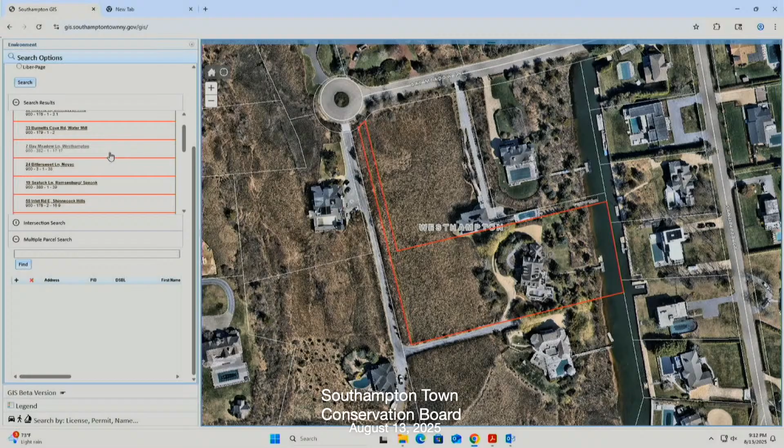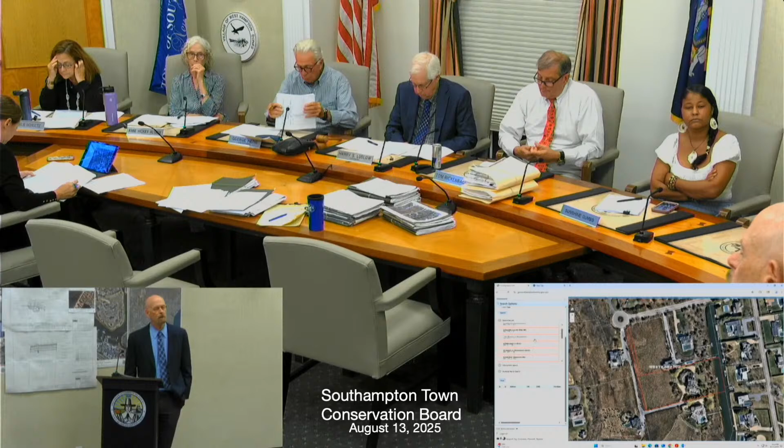The original permit was granted in order to legalize changes made to accessory improvements, and also to require that an existing drive entry, which cut within a portion of a covenanted buffer, be relocated. As an alternative, the applicant has since come back with a plan that would allow the drive entry to remain in place, but would rectify the loss of covenanted buffer by a 2-to-1 increase in buffer within the northerly portion of the property, thereby offsetting the impacts of the drive entry.

There is a resolution before you to approve the modified permit. The original permit, as well as the modification being entertained, requires the applicant to come forward with an extensive native revegetation plan, prior to issuing the modified permit and prior to closing out the permit. So this is a resolution to approve the needed modified wetland permit.

Motion to issue the modification. Second. Resolved that a wetlands permit modification be issued to Stephen Harwin and Phyllis Harwin, for the proposed project, on terms and conditions set forth therein. All in favor? Aye. Opposed? CB 23042, Barbara Zand.

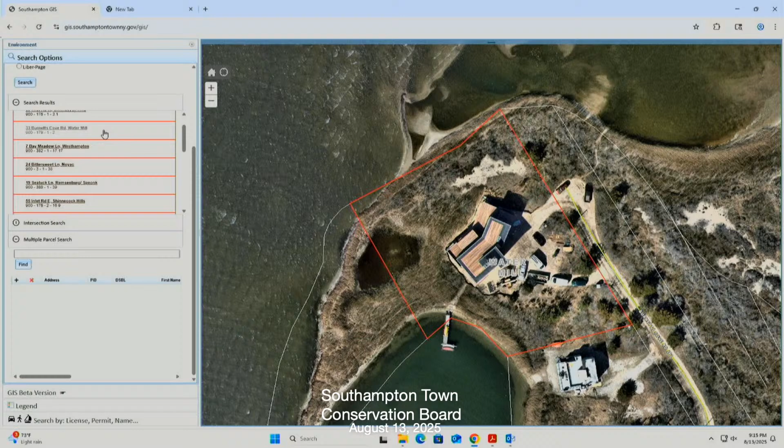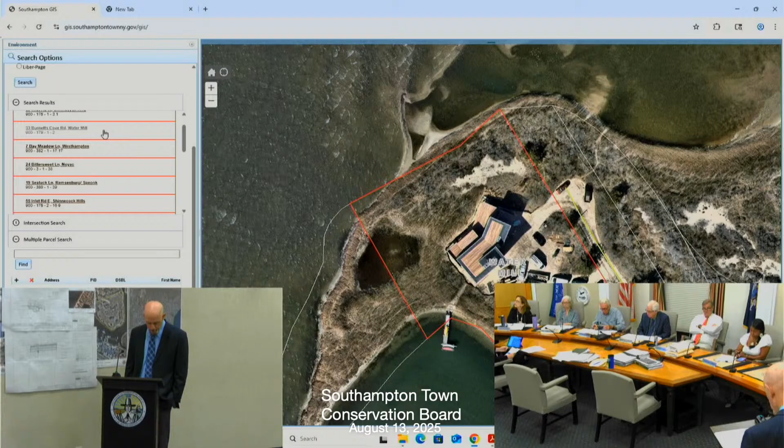That was conditionally approved. However, prior to the applicant coming forward with the requisite revised survey in order to allow for granting of the modified permit, there were additional changes made at the property, namely the installation of a decktop barbecue, installation of rooftop AC units and a generator, and some additional demolition and reconstruction that occurred at my request prior to bringing this application before the board.

I asked that the applicant provide a satisfactory revised survey as well as a new wetlands and buffer restoration plan, which also calls for native vegetation of other areas landward of the buffer. The requested survey and restoration plan was submitted and deemed acceptable, thereby allowing them to come forward with a second application in order to modify the existing permit.

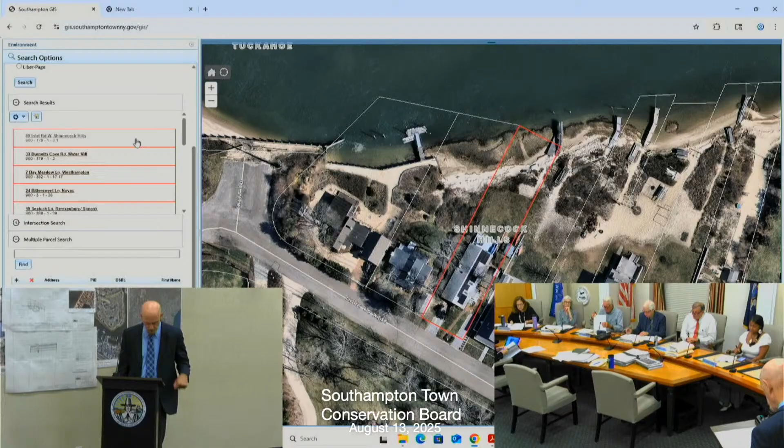This is property 889 Inlet Road West in the hamlet of Shinnecock Hills. The board had adopted a resolution of conditional approval to allow for various improvements, including residential additions supported by helical piles, as well as expansion of the existing deck and installation of a swimming pool.

The conditional approval was contingent upon establishing a wetland preservation area and maximized naturally vegetated buffer, replacing all lawn seaward of the residence, and extending right up to the new extended deck and pool.

Prior to the applicant coming forward with the requisite draft covenant, they had met with me at the property to discuss some minor modifications to the deck and pool footprint, which are consistent with the setbacks previously required by the board. So the applicant is seeking approval of minor project changes through a modified conditional approval. These changes will not result in any new or significant adverse impacts to wetlands.

Motion to issue the modification. Second. Resolved that a wetlands permit modification be issued to Joseph Cerami for the published project upon the terms and conditions set forth herein. All in favor? Aye. Opposed? Motion to adjourn. Second. All in favor? Aye.